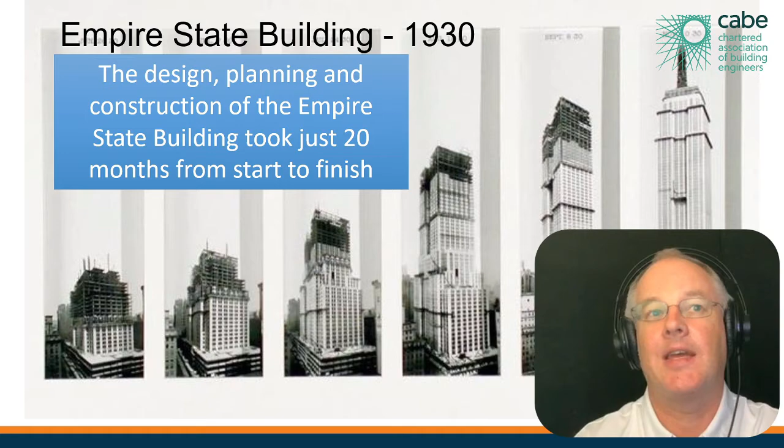So the Empire State Building in New York is over 100 stories tall. It's still one of the tallest buildings, if not the tallest building in New York. The design, the planning, and the construction of this building took 20 months from start to finish. Question is, could we design and construct this building today in 20 months? And I would argue probably not.

The construction was moving at such a rapid pace that in one period of 10 days, the builders created 14 floors. 14 floors in 10 days. When I was working in Hong Kong, if we could do 1 floor in 2 days, we were quite happy.

And the most important thing when you read about this building is that speed, that accelerated construction process. While it was part of the heated 'who can build the tallest building in New York first' phenomenon in the 1930s, it was made possible through precise coordination of the building design, as well as the mass production of steel frames and windows and many other elements.

The precise coordination of the building's design. Do we in 2020 have precise coordinated building designs when we start construction? I would tend to believe not. And how much of our buildings are mass produced off-site? I would argue not enough.

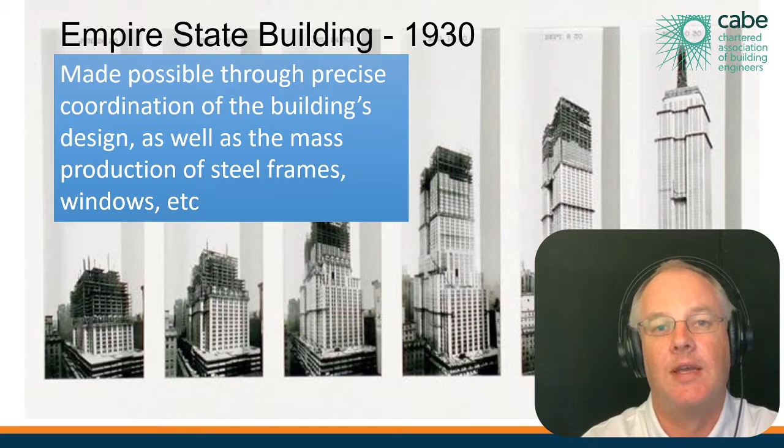So when we talk about the post-COVID-19 phenomenon, we need to look back through history and see what's going on. So let's have a quick look back at what we've achieved in digital engineering, BIM, virtual construction over the last 15 years. And then I'll give you a rundown of where we're going in the next 5 to 10 years.

So my journey began in 2003, earlier than 2003 even, doing 3D modeling and construction sequencing. So around 2000, I started using Tekla. 2003, I was using things like Rhino and CAD. Come 2006, 2008, we were getting into things like Revit.

2006 through 2010, we designed and built the Cathay Pacific Cargo Terminal. That building finished 10 years ago. It started 15 years ago in Revit. Then we did the Hong Kong MTR projects.

And then from 2010 to 2015, we did the big Midfield Concourse at the airport. And now the airport in Hong Kong is going through a massive development phase. In fact, I noticed on LinkedIn 48 hours ago that they were talking about a digital twin for Hong Kong International Airport. So if you want to learn more about what they're doing there, look them up on LinkedIn. And then from 2016 until now, I've been heavily involved in the Line 2 project for the MRT in KL. So this is an outline of what we're going to get through this evening.

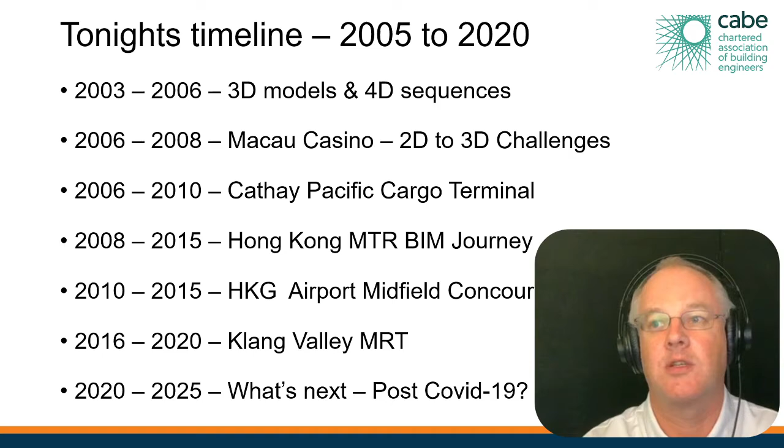So the first ever BIM project, and this is before the term BIM was even coined, you have to go all the way back to 2005 in Hong Kong. And this was a school, the Canadian International School. They wanted to build a world-class musical and auditorium facility for the students.

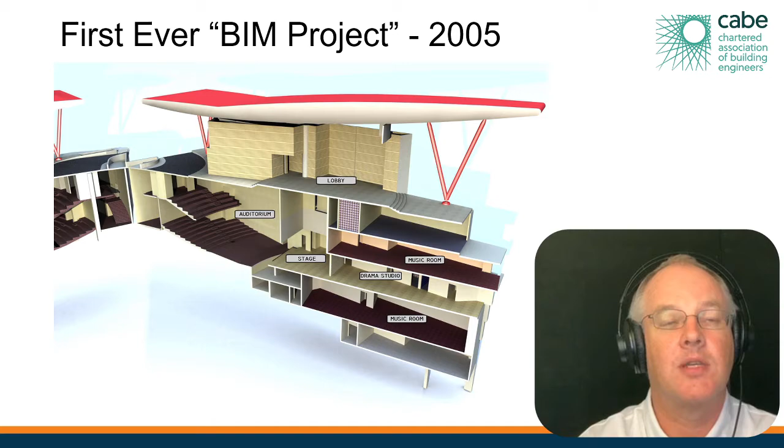We were working with the architects, the engineers, and the owner to do a verification of the design using 3D models. So everything was designed using 2D drawings, and then we built these 3D models. This is a cross-section of the building. And then we looked at the construction sequencing.

Because of the nature of the site, it was a very complicated site, very steep. So we built a 3D model of the temporary works, a 3D model of the existing site, and then a 3D model of all the foundations.

Now this was done in 3D CAD, so this is all pre-Revit. Revit wasn't even kind of written at this point. So this is so long ago. But it just demonstrates to you that building 3D models - if you're not building 3D models in 2020, you better start figuring out how to build them. You can't turn around and say in 2020 that, oh, it's too hard, or it's a new technology, or I don't know how to use the tools. You need to learn these tools, and you need to learn how to use them and make value from them.

We even did the MEP models for that particular building. So we modeled all the ductwork systems, we modeled some of the fire sprinkler systems. It looks rudimentary, it looks quite basic, but it was still done, and it demonstrates what's possible.

Now, moving on, a couple of years later, we did a very large project in Macau, and some of you may recognize this if you're familiar with Macau. This is the City of Dreams, and it was built and designed and put through in a very short time frame, but we relied upon BIM to do some of the coordination.

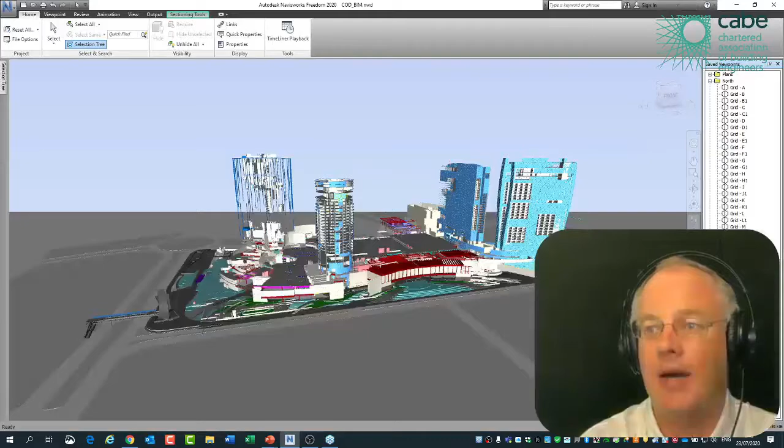Now, in preparation for this presentation, I actually went back and found one of the models. This is AutoCAD MEP and Tekla Structures, and a little bit of AutoCAD Architecture. This is pre-Revit, and it shows you that a model that was built some 10 years ago, even now in 2020, we can actually go into that model and see the detail of it.

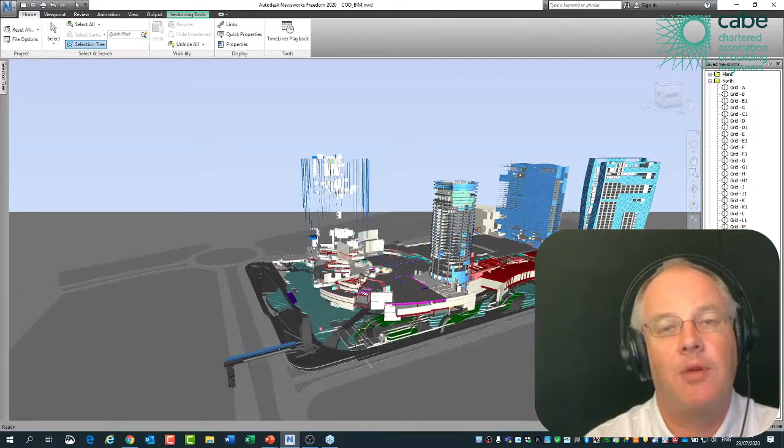So it's worth bearing in mind that models and information you're generating now - the way these technologies work - will still be available to owners, future architects, future engineers as they go back and rebuild and look at these projects. So this gives you a sense of it. And I'm just going to pick a grid line here just to show you what this looks like in section.

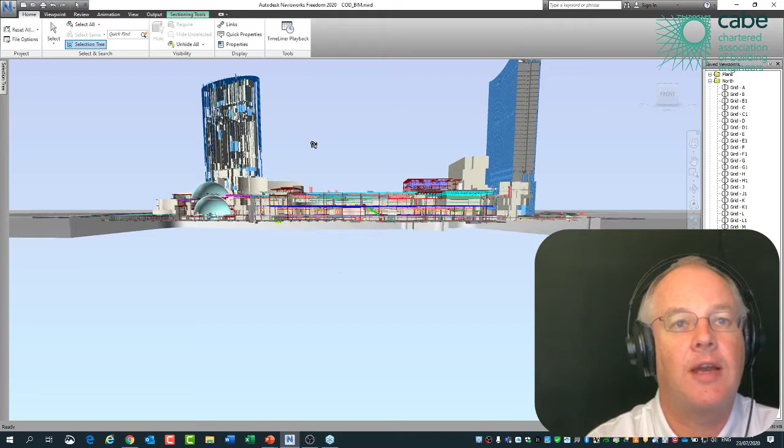So like all these casinos, there's a very large area in the middle. I can't get into too much detail for lots of good reasons, but I just want to show you one feature of this casino. In the casino, there is an exhibition space, and it's a spherical space.

So I'm going to do - oops, what am I doing here? Looking for this one.

I've got to remember how to use Navisworks. So you can see, even in a model from that far back, we had all the mechanical systems and the structural systems.

But the problem with this particular part of the building was we had to design this spherical shape. We had to design the supporting structure around it, the MEP around it, and the glazing system on the outside as a feature. So you can see here that this model is, relatively speaking, quite straightforward.

What I'm going to show you is how we did the coordination of that model. Let me just quickly bring up the right one. Should be this one. Bear with me one second, I'm working on two screens, so things are going to pop in and pop out.

So this is what it looks like. This is a presentation actually from back then. So I'm going to show you the actual geometry.

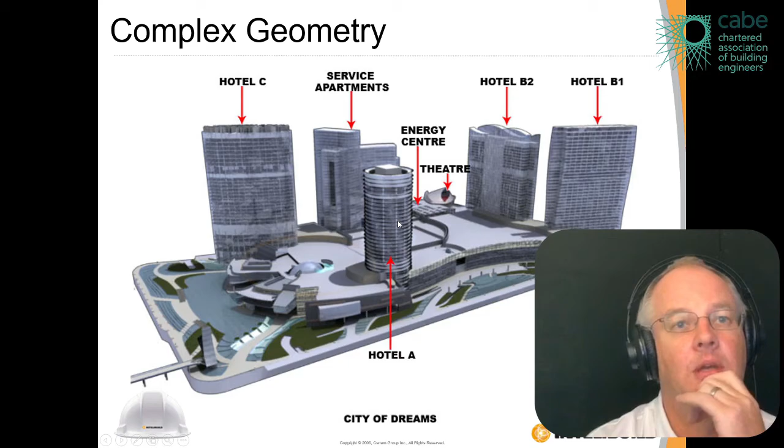This was the architect's design for what was called the bubble, and you can see in the middle of the screen the kind of spherical shape with a slight distortion at the front, and how it fits into the main entrance area for the actual development. As far as I know, it's still there.

When you cut a section through it, you can see the external elevation, you can see the basement car parking, and you can see the complexity of this shape.

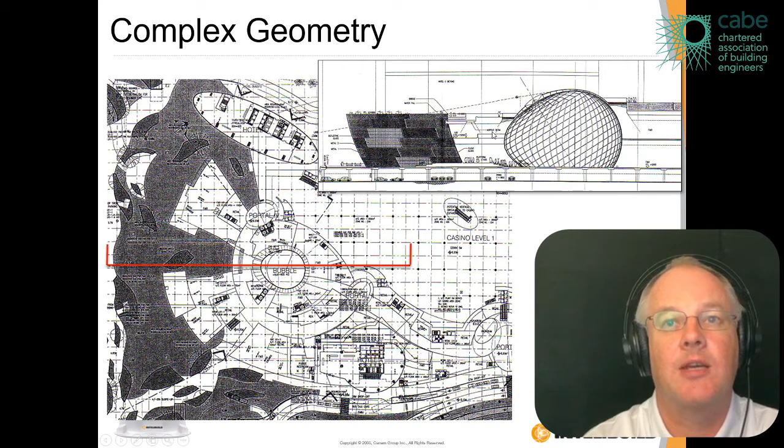In order to design and construct this, we had to use parametric modeling. Now, parametric modeling is rule-based modeling, so if you make changes to certain features, the whole model will change in relationship. So this is an initial geometry model in Rhino.

And then when we get into the detail of it, I can skip this for a second. We then moved into using what became known as Gehry software, which is the same software that we use for airplanes, which is Catia. So this is actually the Catia software.

Catia was used to come up with all of the structural elements inside this complicated geometry. And because Catia is parametric, we could do all this calculation.

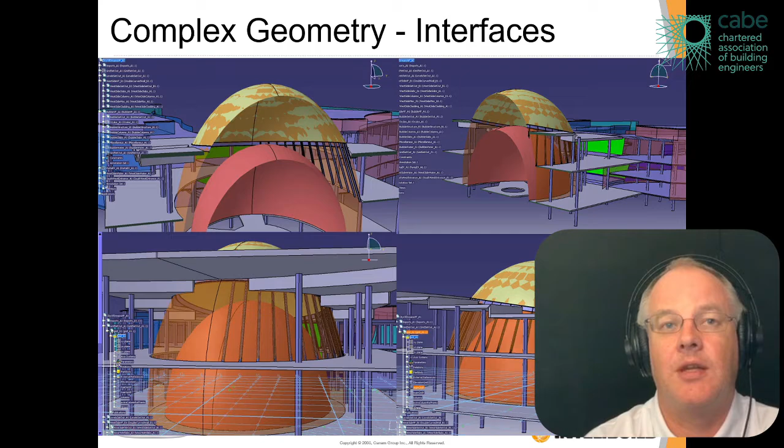So again, this is just a demonstration to say that there's nothing new in the world of BIM that hasn't been done in the last 10 or 15 years. You should be able to find some of these examples either through these kind of presentations, by contacting people like myself who've done it, or by finding out how to do it yourself. The information is there. Now is a good time to go and learn how to do some of these things.

And what's great is when you look at some of this information from all those years ago, we were using these models for quantification. One of the things we're struggling with in the industry right now is how do we actually use the information in the models for pricing? How do we use it for variations and value engineering?

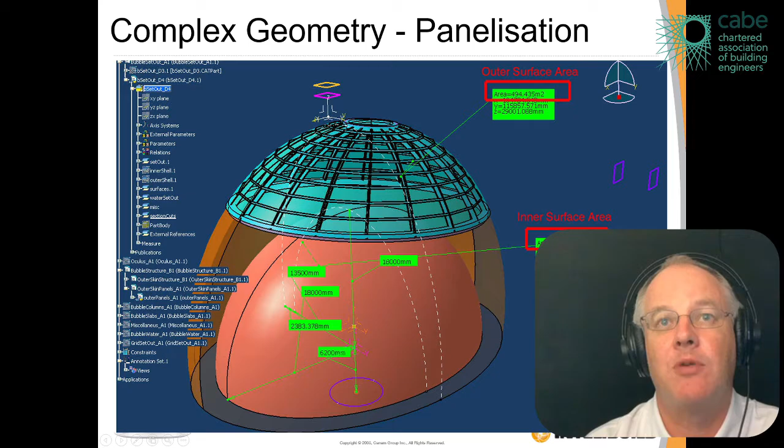We were doing the same thing before. We were looking at areas. We were trying to calculate geometry setting out. So we were using the models to take the model from the actual digital world into the site world, providing all the setting out to the guys on site.

And we were actually using the bigger model of the actual structural steel for all the quantification. So we knew, as we were doing the detailing, how many tons of steel we had. We knew what sections we needed to order, and what the lengths of those sections were going to be. So we had quite a lot of information available to us even back then.

Now, it's worth bearing in mind, when we were doing these projects 10, 15 years ago, they were at the front of the industry. They were cutting edge, pushing the limits. It wasn't the normal. But in my opinion, by now, the industry should have caught up. And you have to ask the question, why is this not normal in all of our projects? If we could do this 15 years ago, why can't we do this today?

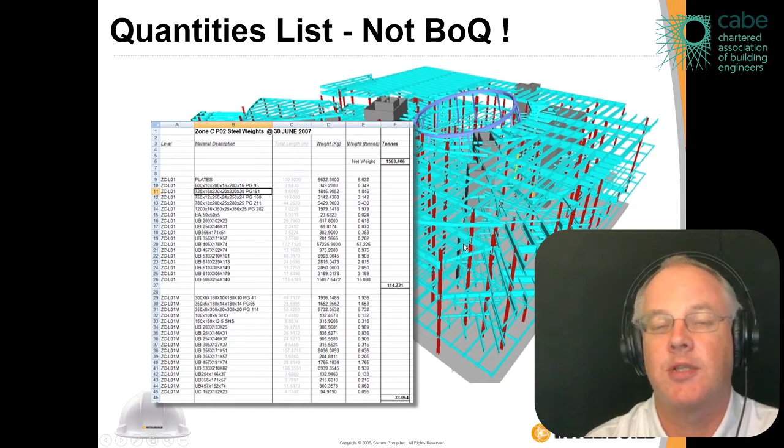So this is what we should be thinking about in terms of post-COVID-19. Now you're going to see me jump around to the next part. So we go back here.

The next one I'm going to speak about is probably the first true BIM project that we got involved with, which is the Cathay Pacific Cargo Terminal. And the Cathay Pacific Cargo Terminal was...

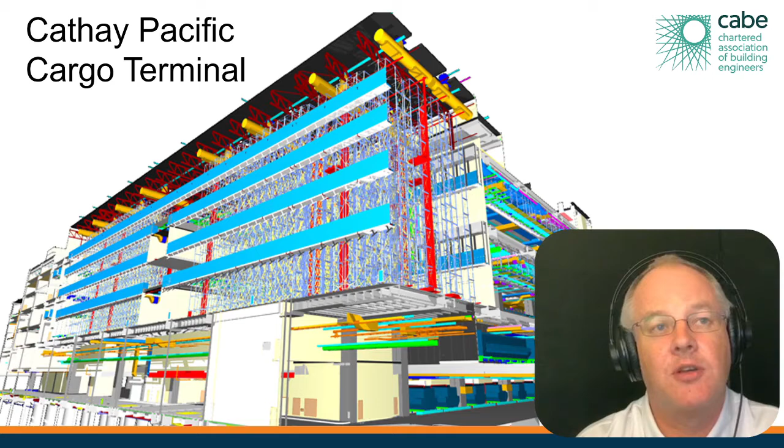There was a requirement in the design specification by the owners, Cathay Pacific Cargo Services, to design and coordinate this building in 3 dimensions, which was a precursor to BIM. When we went to construction, the models were provided to the contractor, a joint venture between Gammon and Hip Hing in Hong Kong, working with Siemens and Lodige doing the cargo systems that had to coordinate this project.

So let's have a look at the details of this one. Just bear with me one second. There we go - so this is another cross section through it.

Now this building deservedly was modeled in 3D, because I don't know how on earth you would coordinate it using 2-dimensional drawings. It's so complicated - there's many layers, many interfacing layers, many secondary systems, many access systems and fire systems, et cetera. So it really begged to be modeled and coordinated in 3D.

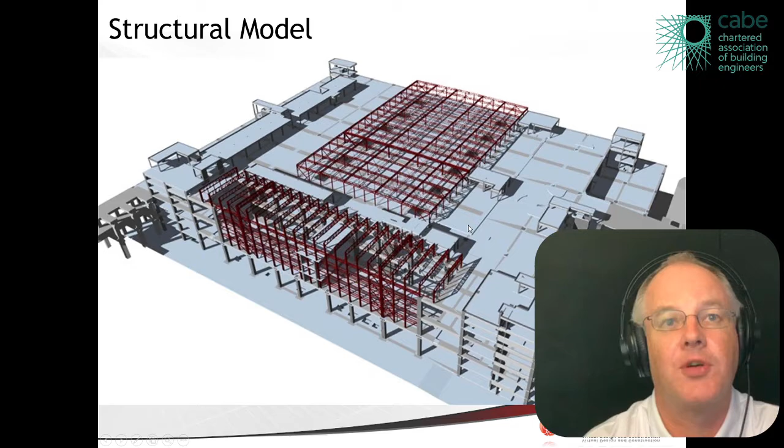And the mantra here was to model first and draw second. So our objective was to use the Revit software to produce as many drawings as possible, but our real objective was to coordinate the design.

So here you can see a snapshot for those of you who know Revit - this is actually Revit Structures 2008, which means it's a 13-year-old piece of software. I wouldn't like to have to use it now. It's a lot better now than it was all those years ago. It had a lot of limitations, but it still was a powerful piece of software.

And we used it for this kind of documentation - for doing the detailing for the frames, and for laying out all the double T's. And this is what it looks like back in the models.

So again, when we built the models, we tried to be smart and put in the names of what the double T sections were, what the inverted T sections were, so we could get information from the models. Now, we did not use this model for quantification - we used it mainly for coordination, and you can see how we've done that.

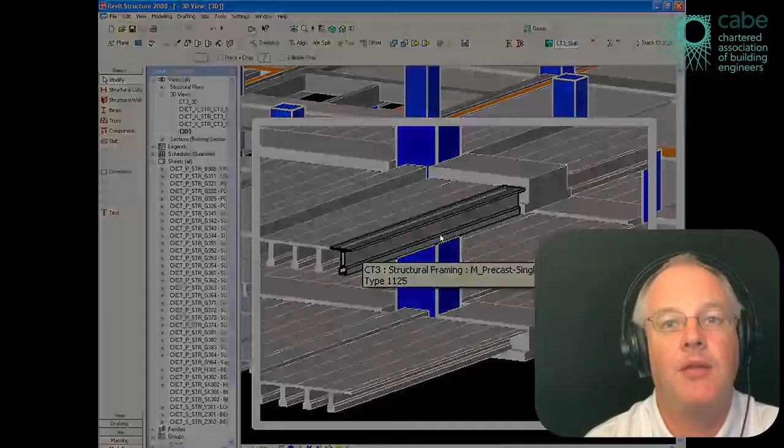This is the architectural model - there's an office building in a corner, and then you have this massive warehouse. If you have flown into Hong Kong, you will have noticed this building. It's impossible to miss. It's huge.

And then on top of the architecture and structure, we did all the MEP modeling. So you can see here an example of the MEP framework - you've got pipework systems, cable tray systems, and mechanical systems. So again, this is a very good example of a 3D MEP model that was done for coordination purposes.

So this is one lesson that you can do it. Second lesson is, did we have enough detail in the design model for construction? Could we live up to the Empire State Building standard of a precise, fully detailed design? The short answer was no, not really. So let me explain why.

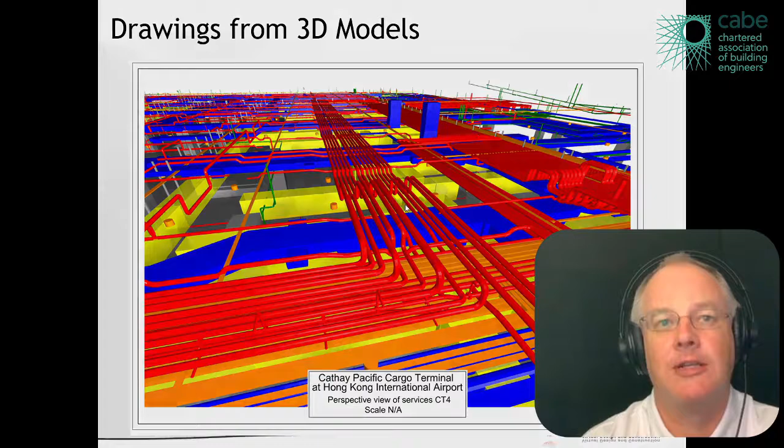We were using the model to produce design drawings, and we were going to use it to produce construction drawings. But the design drawings were being produced by us and the design team primarily to meet the normal standards of the industry - in other words, to provide enough information for a contractor to price the project, but they would have to go further to do detailed shop drawings and fabrication drawings.

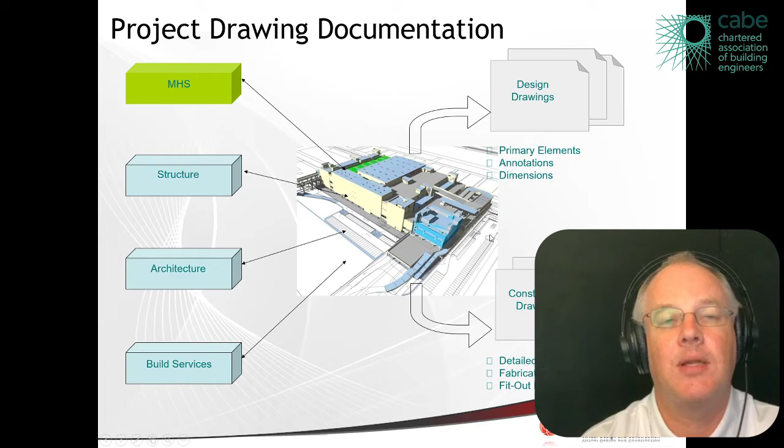So it was effectively a reference design, if you want a better description. But it was a very well designed, very well detailed set of plans - they were design drawings. And there's the software that we were using: Revit Structure, Revit Architecture, AutoCAD MEP.

This is just to demonstrate something else. If you're living in Hong Kong, they're now talking about using ISO 19650 BIM standards. If you're in Singapore, you've got the BCA standards. In Malaysia, we're using PAS 1192 and ISO 19650.

All of those standards are based on one simple principle, that you have a server. In our case, it was actually a local area network, not a cloud, but now it's all gone to the cloud.

You have a server where you have working information, in our case drawing production information, and you have published information, which is information that's shared. The same principle applies today as it was when we did our project. It's on a server, shared between the design teams, and then published when it's approved.

We were publishing PDFs and DWG. We were using a structured folder structure. Now this is quite a basic folder structure, but you can see we had a live working environment and a published environment, which is what the current standards all require.

So you have 2-dimensional drawings, 3-dimensional CAD files, clash analysis files, and native Revit models. All of this information was properly named, so we could tell by the naming convention which project it was, which type of file it was, which discipline it was, and what level of the project we're looking at.

So we did have a file naming convention. The modern file naming conventions are slightly more complicated, but it's the same principle. Everything was structured in terms of information, and everything was controlled in terms of the naming - a crucial part of the world of BIM as we see it now. We had somewhere in the region of 3,000 drawings at the design stage.

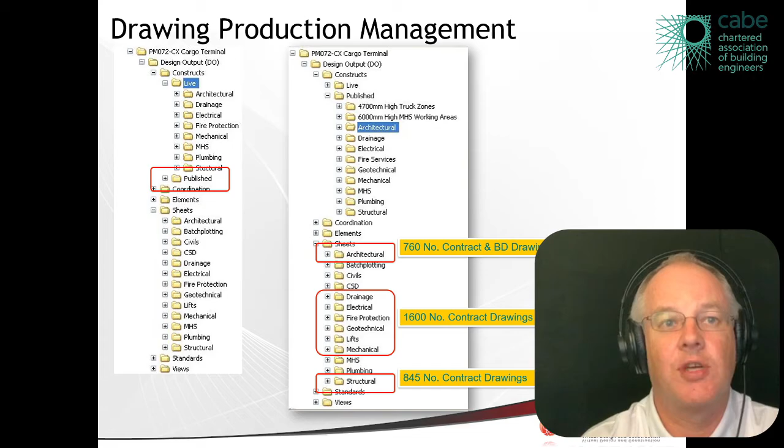So this is a typical example of what one of those drawings would look like. Lots of color, each system has its own color. And the beauty of Revit is that you can draw a section wherever you want.

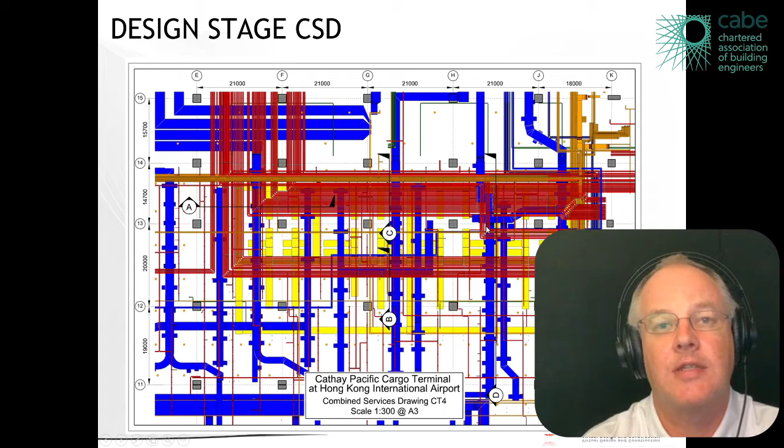If you've not used Revit before, one of the key features of Revit is it does very, very slick drawing production, and you can produce quite a lot of drawings and quite a lot of detail if you know what you're doing. And this is what those sections would look like.

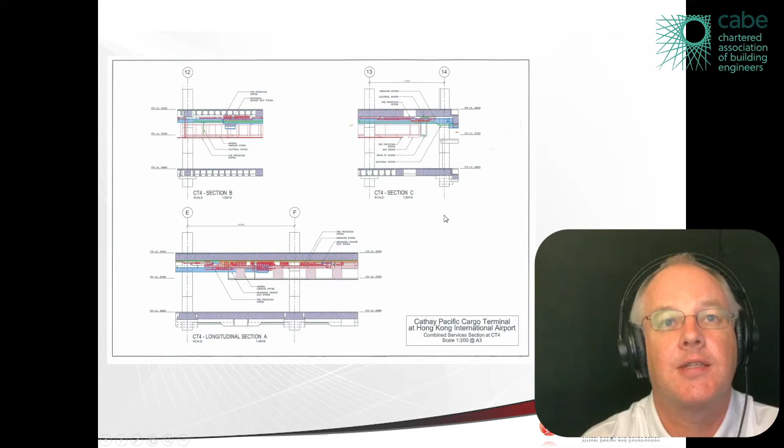So you can see the structure, the building services, the access ways, etc. You can probably argue on scrutiny that they weren't the best drawings in terms of line types, hatching, and where lines meet. But for the first editions of Revit, they were pretty good. Now Revit's got very slick, so producing drawings in Revit's actually quite easy.

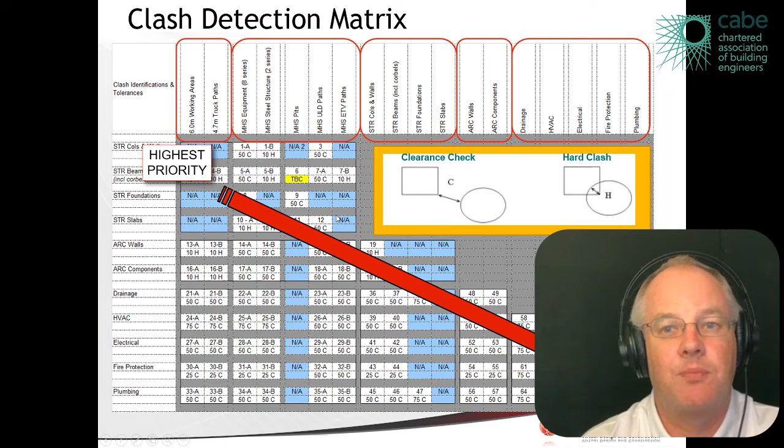The objective here is that you identify the critical elements from the client's perspective and operations perspective, and then you drill down through the structure, the architecture, and eventually the MEP. So you're working through a process of identifying what are the highest priority coordination issues and what are the lowest priority coordination issues. And that hasn't changed in 20 years.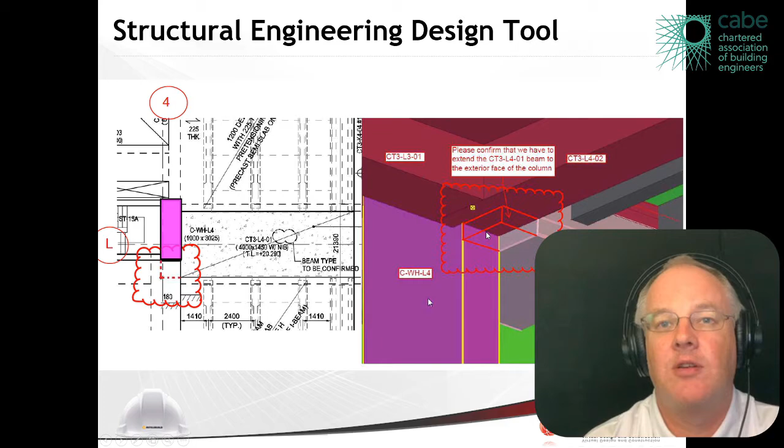And here is the key part of this particular presentation. This is now the contractor raising queries using the model for the detailing of all the concrete. They're starting to identify where the modeling has not been completed or had not got to a certain level of detail. In this case, the model demonstrates the size of the beam between the grid lines, and it demonstrates all the beams coming into a connection. But because this is a complicated movement joint, the detailing by the designers doesn't include all the fine detail of where the corbels will stop and where they'll meet.

Another issue we've discovered, and this issue is still relevant today as it was back then, in these large infrastructure projects, the designers will typically model the structure as being flat. In other words, they won't allow for any falls, any kind of cross falls, because that's something the contractor will pick up in the shop drawings. But when you start modeling in the falls, you start to realize that every one of these connections is slightly different, so you have to account for all that when you actually start doing your concrete pours.

So you can see that there's a fall on the edge beams, and then there's a cross fall on the secondary beams, which leads to some very complicated joints in this detail. This is where we discovered that the cope, or the joint at the end, is not square. So it's just using a model from the construction phase to show this detail.

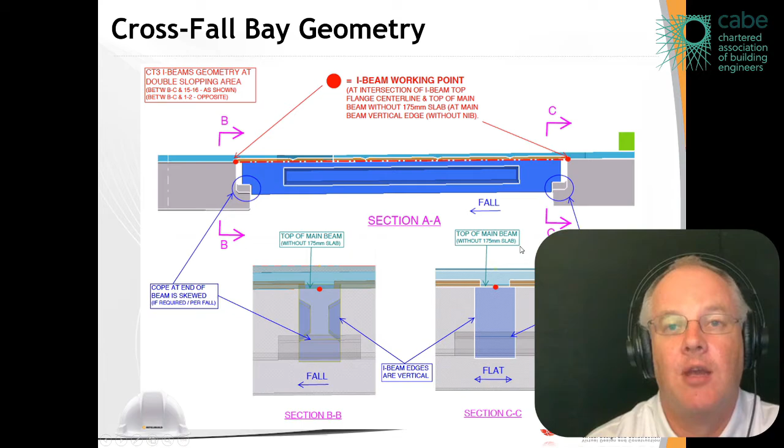Now the lesson learned here is that ideally you want to get the contractor involved as early as possible for them to bring this level of expertise into the design team, or you need to get them as an advisor to get the models to this level of detail. But the trend hasn't changed. The design engineers' models and information are still going to be suitable information for tendering and for construction, for the contractor to take forward detailing. In order for BIM to be really successful, you need to get to that level of detailing, much higher, to find the real issues.

So where do we get to? That's the Cathay cargo example, back in 2008, 2010. So that's 10 years ago.

And then we're going to go and look at something a bit more recent. Again, this is a Hong Kong example - there'll be one in Singapore soon enough. This is the Midfield Concourse. This was, again, designed in 3D by the design consultants - an Arup, ADAS, Mott MacDonald design team - and they did a pretty good job at the design. Quite an interesting design, in fact, the way this is done.

And then they provided the models to the contractors for the construction stage. So again, I'm going to show you some of the challenges of going from a design model to a construction model, and some of the things that you need to be watching out for as more and more people start using models for design and for construction.

So we're going to come all the way back down here to the next PowerPoint deck. Some of you who are PowerPoint aficionados will say, well, hang on, why have you put all these slides together? I said, I haven't had the time.

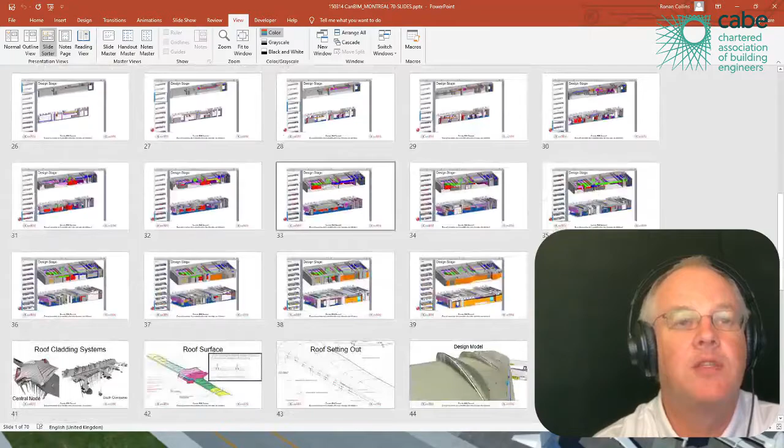So let me very quickly show you this. This is the overall slide deck, and it goes through exactly the same as I've shown you on all the other projects. On this project, we were modeling the structure, the architecture, and all the building services. We were using the model for coordination and for drawing production.

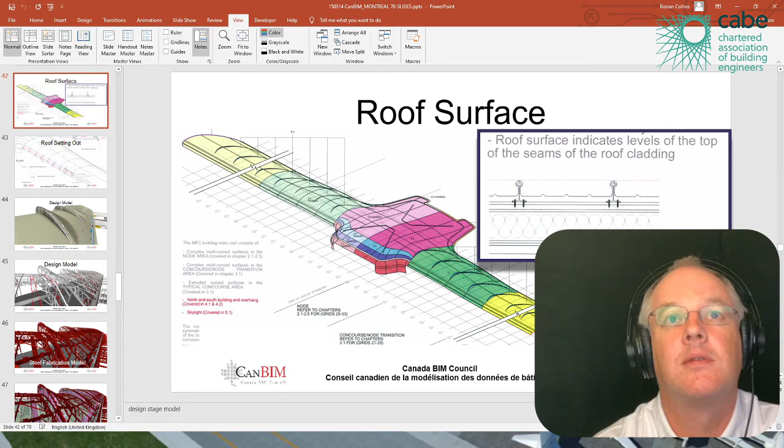And the one thing that I want to share with you from this project is the geometry on the roof. So I'm going to show you the roof surface and how that was designed. Just bear with me here. That, to go down there, out of the way.

So what I want to talk about here very quickly is this geometry. What we're seeing now is that because the software is becoming so powerful and so useful, architects are becoming more and more creative with their designs, and somewhat organic. And here's a challenge when you do that.

So these roof systems particularly, there's a huge emphasis on the contractor doing the detailing. You may have a very specialist contractor who can do the detailing for these kinds of roofs. So rather than the architect trying to second guess or outguess the construction industry, they come up with a performance specification and an outline design.

So in this example, they provided the surface geometry, and the surface is very well defined. You can see all the different colored surfaces - all of them have geometric definitions in terms of radiuses and setting out. You can see all these different curves, and this is the definition for the roof surface.

Now this is critical for the airport. If this roof ends up too high, it will actually block the line of sight between air traffic control and the actual planes. So this roof geometry is critical.

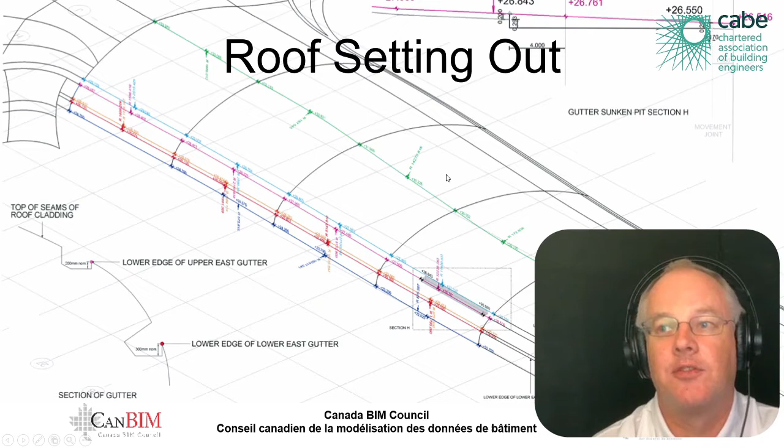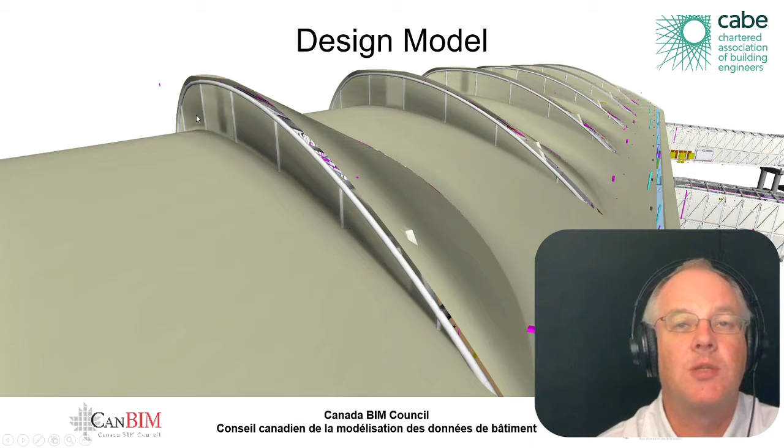But apart from a single gutter along the side, this surface doesn't allow for the gutters along the back of these skylights. It doesn't allow for access ways through the space. And it certainly doesn't allow for the detailing of the steelwork. So let me show you an example of what I mean.

So using the architect's surface, the engineers have developed the geometry for the roof steelwork, and they've done a reasonable job. You can identify the primary trusses, you can identify all the primary structure, you can see where the posts are going to go in for the cladding systems, and you can start to see the outline of what is supposed to be a walkway for access.

That's the design model, and this is the fabrication model, pretty much taken from the same position. And there's a stark contrast and a stark difference. The biggest difference is all of the connections required for the actual roof systems, but also all of the secondary steelwork that was not in the design.

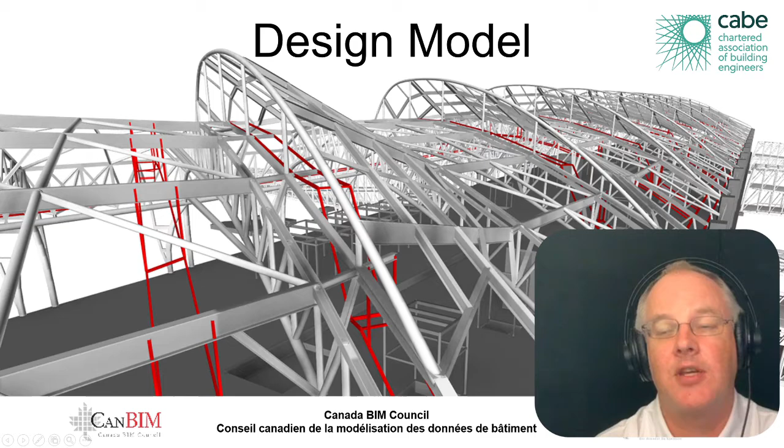So if I go back up one, so you can see here, for example, along this elevation, there's a lot of steel that wasn't modeled at the design stage. It's considered secondary steel. And when you model it in, there's quite a lot of steelwork involved.

So the challenge when you're working on these projects, particularly if you're a contractor, is to understand what has been modeled by the consultants, and more importantly, what has not been modeled, because that still has to get modeled, it's still got to get coordinated. So there's a lot of lessons to be learned from these projects in terms of, well, we know what the consultants are more than likely going to produce, but what do we have to produce to actually construct this building?

And then when you add in the next layer of complexity, which are these pink blocks for the access walkways, and then you start to see the ceiling systems underneath, and then you start to see the actual roof cassettes. This is a structural system with the acoustics beneath the cladding system. You start to put in the walkways.

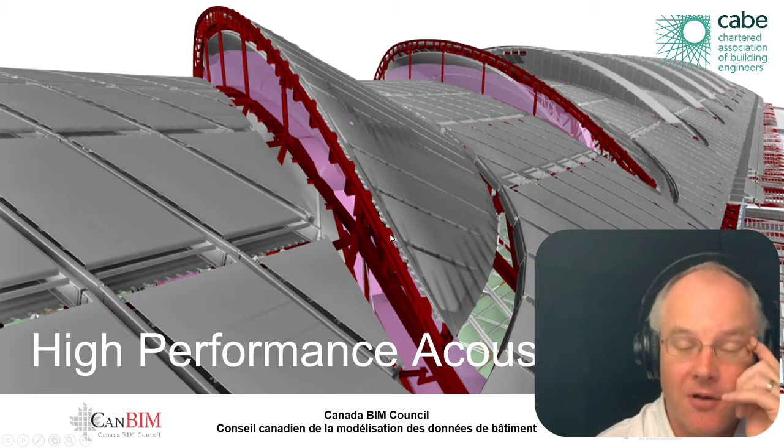This becomes a very complicated thing to coordinate, and it led to many, many meetings, many, many RFIs, many, many discussions, a lot of changes in terms of structure, a lot of changes in terms of geometry, but eventually it did get built. It turned out to be a fantastic building.

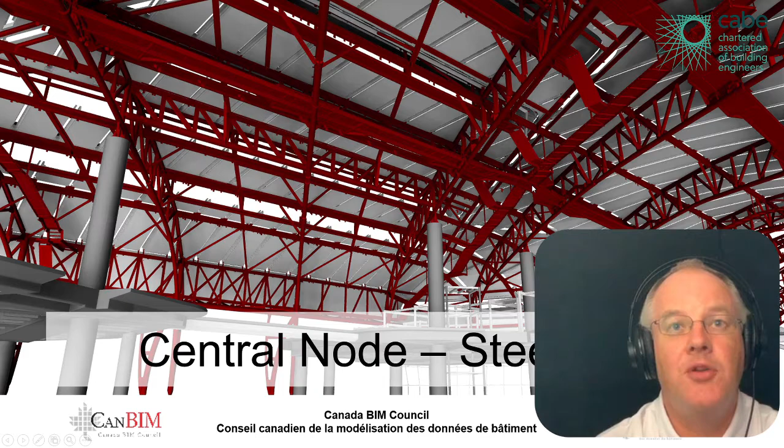But when you start to look at this from underneath, just getting the cladding system onto the building was one challenge, but to actually coordinate all the building services in the space and then to coordinate the ceiling in the space was also an exercise.

So the contractor elected to do all of that in 3D using BIM processes. So all of the mechanical systems, these were all modeled by the mechanical contractor. The lessons that we learned on the Cathay cargo terminal was to actually get the mechanical contractors involved in the modeling process. And they would model where they wanted the ductwork, where they wanted the pipe work, where they wanted the cable trays. And they would work with the steel fabricator to make sure that it was all coordinated.

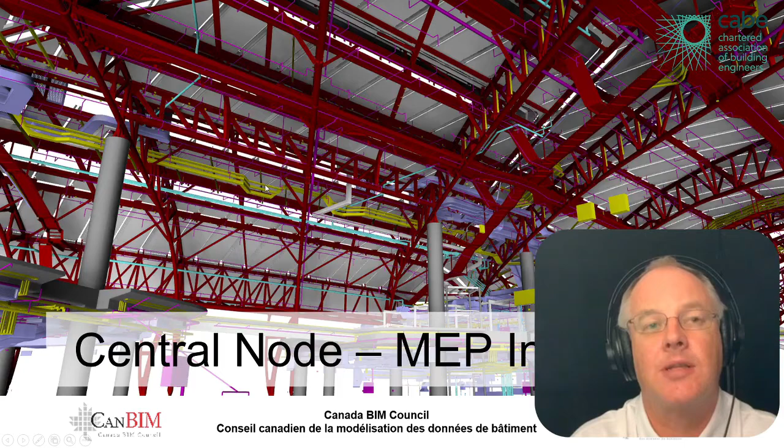So what you're looking at here is actually a model that was developed by 3 different contractors or subcontractors, depending on how you look at it. There's the steelwork contract, which was all done in Tekla. There's a roof cladding contract, which was done in Tekla. And then there's all the mechanical electrical systems, which are all done in Revit. 3 different contractors working on 3 different programs at 3 different schedules.

A real coordination challenge. And then beneath all that, you have a ceiling grid, and the ceiling is a very complicated grid of triangulated panels. I can't remember the specific number, but there was a huge variety of panels. Some of them were perforated, some of them were solid, some of them had penetrations. I think there was over 1,000 different types of panel that had to be slung into the ceiling.

So one of the challenges we had, and it's still a challenge today, is how do you go from 3D CAD or 3D BIM or digital engineering models and relate that to site?

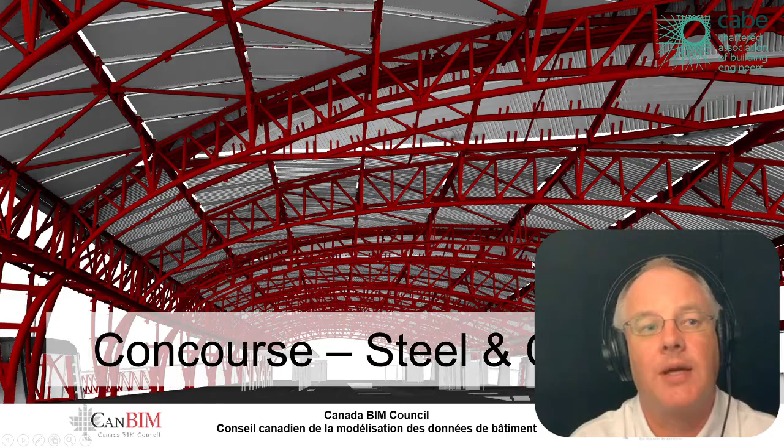Now, this was less than 10 years ago, probably 8 years ago. So how did we link what was happening on site back to the models? What we actually did was invest into laser scanning. I'm just going to show you how we did this.

So we actually scanned on site all the steelwork as it was erected. You can see it here, this green blur. We used the laser scan to compare to the actual fabrication models, so we were able to compare what was happening on site to what was actually designed and detailed. We could tell if the chords for the trusses, which were in between the ceiling panels, were in tolerance and into specification. So again, another topic for learning going forward: you need to understand how to verify what's on site and compare it to a model.

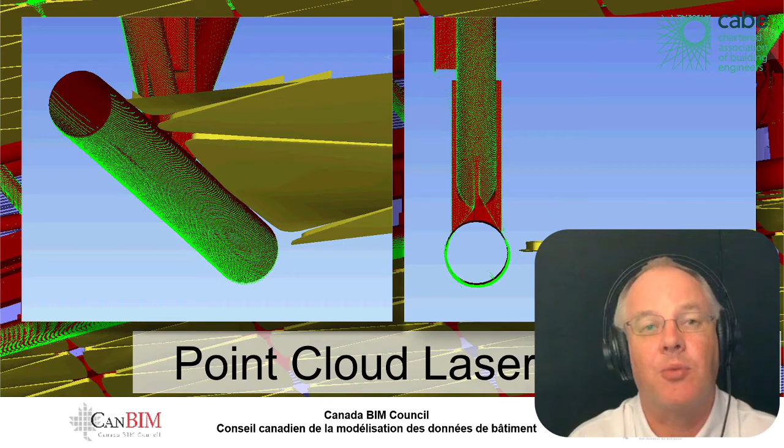Now you have more and more technology available. You can use your iPhone or your iPad to take photographs and create 3D models from photographs. You can use augmented reality, so you can actually bring the model to site on your iPad and look through your screen to see where the model is in relation to site. And you can do very detailed laser scanning. I'm not going to get into the pros and cons of each - it's a lecture in itself, but we could probably set that up as a separate conversation.

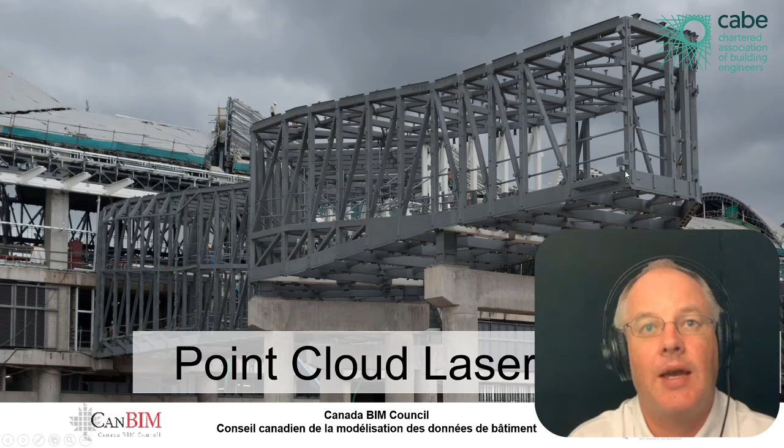But I want to quickly show you one of the benefits we learned about using laser scans. These are the actual air bridges or gantries, and in order to cover these in cladding, we had to measure all the connections on site. So we laser scanned all the gantries, measuring for each connection plate how far out of tolerance they were and where the slotted holes were, to make sure we didn't have to make any adjustments to the cladding system rails so we could quickly erect the steelwork on site. This is a really good example of using laser scanning to verify shop drawing details and make sure it's in tolerance for the next phase of works.

So we're getting a bit closer to real time, and I want to quickly show you some of the solutions. We've talked about BIM in terms of building information management. Virtual reality is something I have some experience with, but I've found limited use for it, particularly on construction sites - it's very powerful for design reviews though.

Augmented reality is an absolute breakthrough technology. We're using it on 10 of our sites right now, taking Revit models onto the sites on iPads, using it to verify rebar, to verify cast-ins, to verify MEP systems, and to verify a lot of the works on site. So augmented reality is something you definitely need to figure out and learn. But you can't do augmented reality if you haven't got proper detailed coordinated models.

Drones is a topic unto itself, which I'm going to touch on. Photogrammetry is the conversion of images into models - you can use Context Capture from Bentley, or Recap Pro from Autodesk, or a number of similar products out there. You can use laser scanning, which gives very fine detail. 3D printed models are great for doing modular testing. And then you've got all the other stuff at the bottom.

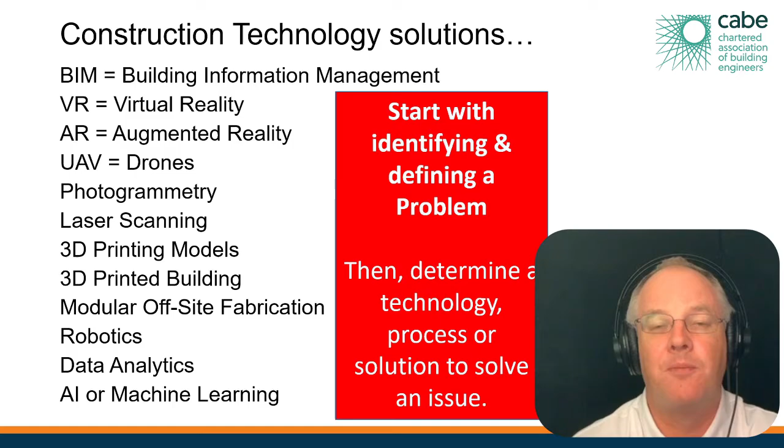On the construction site at the airport, we were trying to solve a surveying problem in very complicated access areas. In the work we're doing now using augmented reality, we're trying to solve a problem where the sites are very dynamic and we need to make sure they're checking the right information. So we have always defined a problem - well, not always, but that's now our rule. We now define the problem and then we go and find the solution.

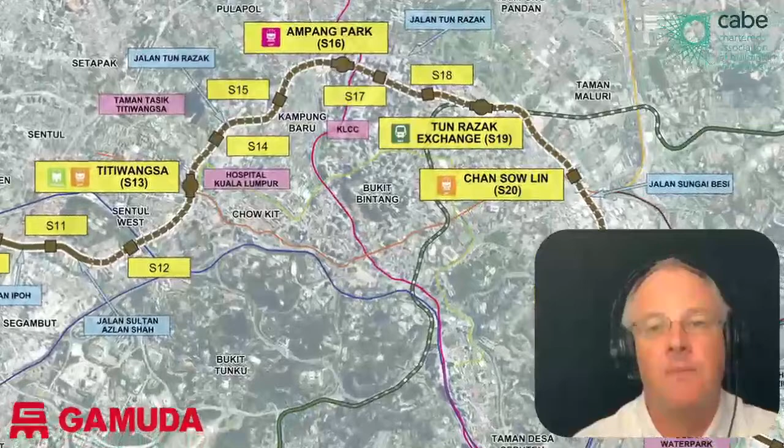So let's bring it right up to today. This is the KVMRT Line 2 project in Kuala Lumpur. This is a massive project - a 52-kilometer alignment through the city of Kuala Lumpur. This is the second line that's been built in the last 6 years.

The section that I was working on is the underground section. It's a design and construct contract led by the MMC Gamuda contractor, with AECOM as the lead consultant, with a multitude of other consultants in support. It involves the construction of 13 kilometers of twin-bore TBM-driven tunnels through the city, which is a mixture of Kenny Hills soil, a compact soil, and karst limestone, a treacherous ground condition to mine in.

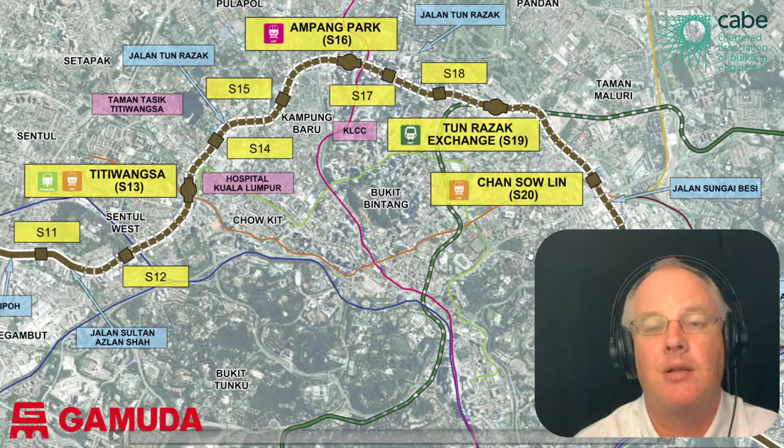There are 10 underground train stations, and all of the stations, all the tunnels, all the ancillary structures were all designed and modeled in Revit. And then the models were used for coordination, for design documentation, for construction documentation, and are now being used for all the MEP installations. So this is just one of these 10 stations - it is at Titiwangsa. This is the architectural model in Revit.

So you can see that first rule - only model the Revit architecture. Then you've got the structural model, so this is all of the D walls, all the structural information. And then this is where this technology comes into its own.

Inside these station boxes are some very sophisticated, very complicated building services systems. So here you can see the mechanical systems, electrical systems, drainage systems, and in the background you can even see the tunnel systems coming into the stations. And the only way to coordinate this, in my opinion, is in BIM. There's no other way of doing this, unless you've got thousands of staff and thousands of hours.

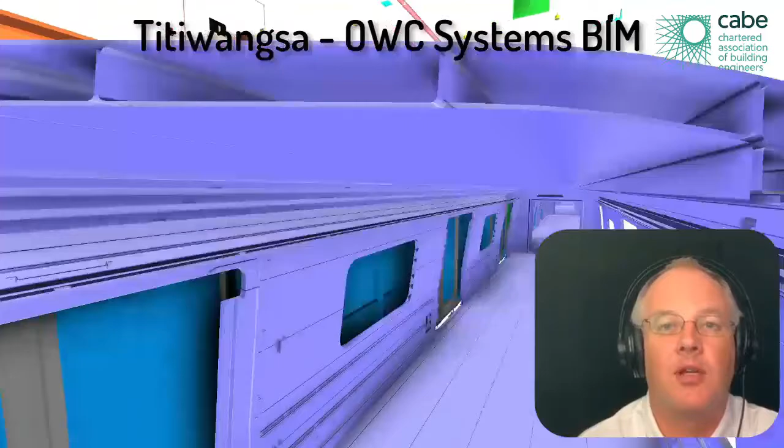The models also include all the operating train systems. And then this is a federated model - this is level 2 BIM as defined in PAS 1192. This is a federated model.

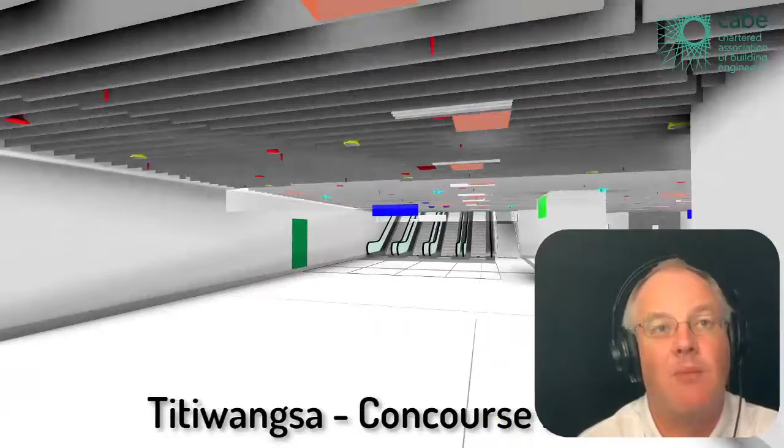This is all of those systems in a single digital environment, and all of the information for the systems is included. So if I was to click on any one of these elements, you would be able to determine what it is, what it's been designed to do, and what it's intended to be specified as. You can use these tools to cut cross sections so you can see the depth of the station.

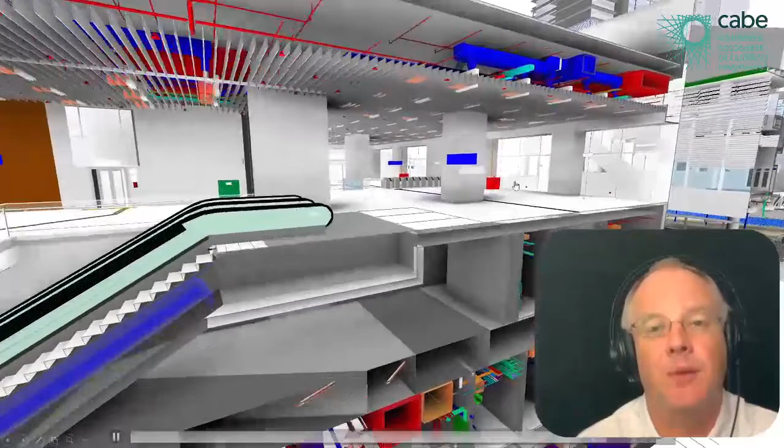So this is a classic implementation of BIM. The only difference between this project and the previous ones is this has been driven by an information protocol, which I'm going to get into in a bit more detail. So on top of doing BIM for modeling, on top of using BIM for drawings, we also wanted to use BIM for asset information or asset data capture.

So this is the actual use case for BIM on this particular project. During the phases of design, from preliminary design through final design to construction into final CSDs and as-builts, all the normal stuff - visualization, design authoring which is modeling and drafting, doing virtual design reviews and coordination, clash coordination - and then asset data capture. So the lesson that's been learned on this project is all about information management and data capturing.

So let me show you some of the things that we've learned. This is a classic example of one of those models, just a snapshot of the same thing that I showed you in the video. So the first thing you have to do is you have to change the culture of the teams.

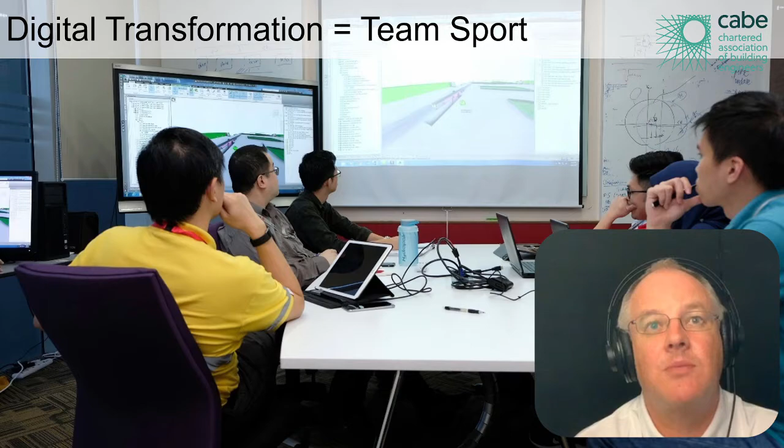The first thing we did on the underground project was take a lesson we learned back on the KLIA cargo terminal: we co-located the teams. The engineering teams were all set up in an office in Kuala Lumpur with all the major decision makers in that office. The architects, the structural engineers, the building service engineers, and the contractor's technical team were all working from the same office, so it was very easy to get everybody together and do a review.

The second thing we did is we drove all the reviews through models. So all the design reviews, all the coordination reviews were driven by models. And in a lot of cases, we would have a representation from the client.

This is Mr. Yap from MRT, an interface coordination engineer, who attended some of the meetings. This is Chi Heng from the AECOM lead team. Chi Heng and others are now working in AECOM Singapore, so if you want to get a coffee and ask him if this presentation is true, look him up there. And then the rest of the team here are from the engineering consultants.

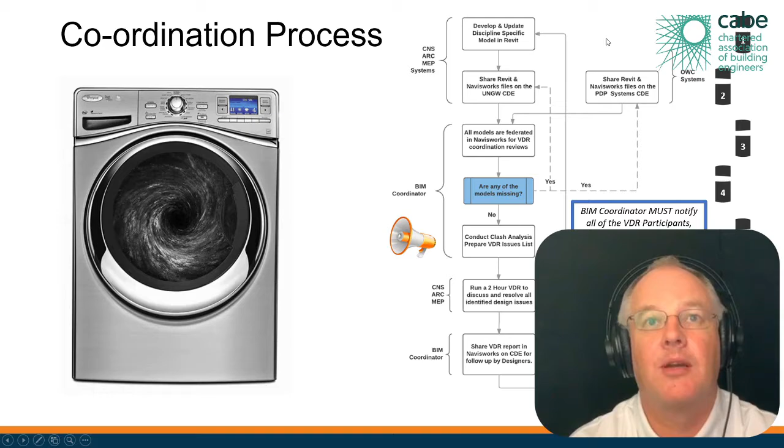They're reviewing the models, and what they're doing is following this process - sorry, some was blocked out by my big ugly head. We have a coordination process where all the models were checked and then coordinated, looking for coordination issues.

This is the low-hanging fruit, the easy part of BIM: checking if one model is coordinated with another. You can identify if the cable trays are in the wrong place, if the pipes are clashing with the ductwork. You can find lots and lots of issues.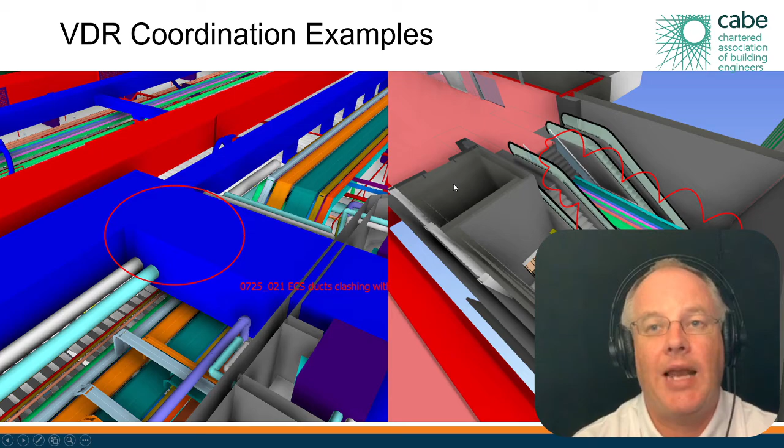The one thing we did on this project that was different from previous ones is that all these clashes, which would normally just be left in Navisworks - and we've saved issues in Navisworks many times in the past, since it's our coordination tool - we actually took those issues and published them onto a cloud.

We put them onto a tool called BIM Collab, so you don't have to have the model to see what the coordination issues are. More importantly, BIM Collab allows us to issue them to particular people in particular organizations, making somebody responsible and giving them a deadline to fix it. So on this project, we went from just doing clash analysis and writing clash reports that nobody looked at, to actually using a cloud tool where we could assign responsibility to individual engineers and architects and get them to resolve problems within a certain time frame.

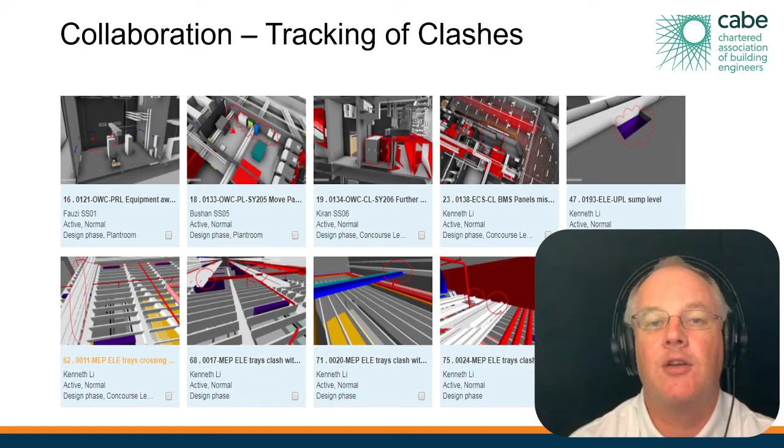So this tool became very, very important. If you've not heard of BIM Collab, it's definitely worth looking up, and there are a number of other tools out there that do similar functions. The key here is to make the issues as available as possible to as many people as possible.

Now the backbone to all of this, as I mentioned earlier, is the common data environment. On this particular project we're using ProjectWise. We have staff in Kuala Lumpur, Singapore, Hong Kong, the Philippines, and India. While we had co-located engineers leading the design, all of their supporting teams doing the engineering calculations, a lot of the modeling work, drawing production, and design management were being done offshore. So we needed a platform to link all these locations together - this common data environment, or CDE, another common BIM term.

we have to rely on technology like Microsoft Azure servers, and we have to have basically backup servers locally. So we've actually got a replication server in the main office, so overnight we would get all the files set up in the main office based on the cloud information.

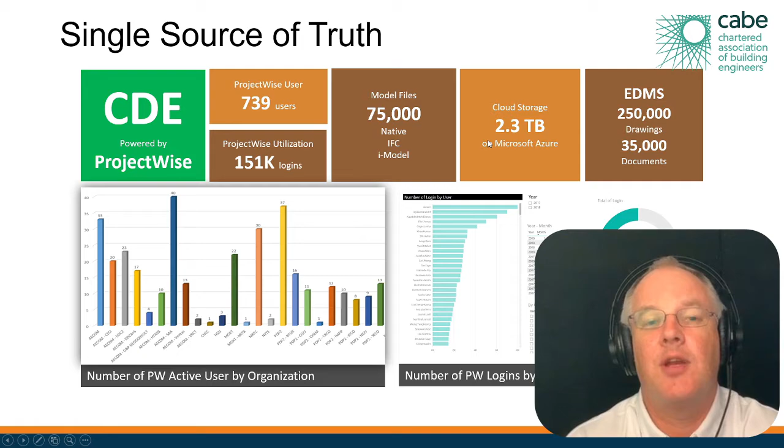So there's quite a lot of technology involved. But the most important thing here is this notion of a single source of truth. The only information that was valid on the project at any given moment in time was the information on the ProjectWise server. So if you had a model from somewhere else, or you'd received it by USB, or someone had emailed you some PDFs, they were not valid—they may have been superseded or incorrect. So the only valid information was on this particular CDE.

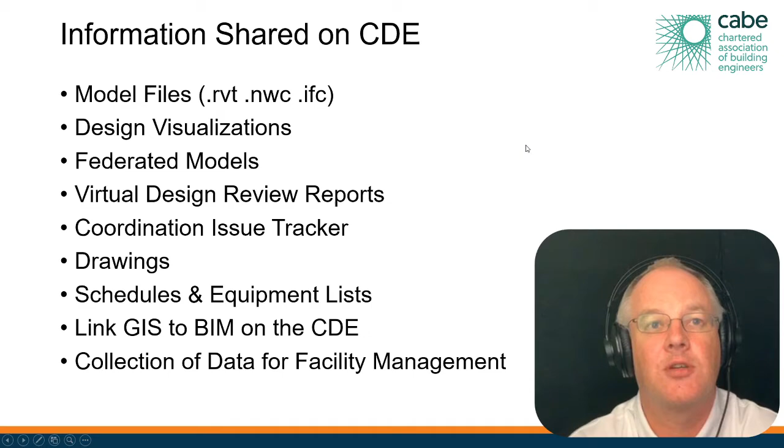Just to give you a sense of it, you can store any digital information that you want on a CDE. That can be models, reviews or reports, issue trackers, drawings, schedules, and most importantly, all the asset information management, which I'm going to show you.

So we've actually complied pretty much in its entirety with PAS 1192, and now we're working on upgrading our skills to ISO 19650. Again, if you don't know what these standards are about, or what their requirements are, now is a good time to start learning about PAS 1192 and ISO 19650.

So I'm going to give you a couple of tips as engineers. Actually, I need to go back—in order for these technologies to take off in any organization, excuse me one second.

There are three questions you should ask: What do I need to do? What does my boss need to do? And what do my colleagues need to do?

For something to be successful, this is a team sport. You may be tasked with identifying the business case, and finding out what the right technology is. Once you've done that, you need to understand what your boss has to do to keep the whole thing going. And then you need to understand what your staff and colleagues need to do—in other organizations as well, not just your own.

So let's look at some examples. I always say that you need to take ownership—be responsible for your own ideas. You identify the problem, come up with a way to use or adapt the technology to address it, then develop a budget, a plan of action, and roll out how the innovation is going to take place. Basically, you own it.

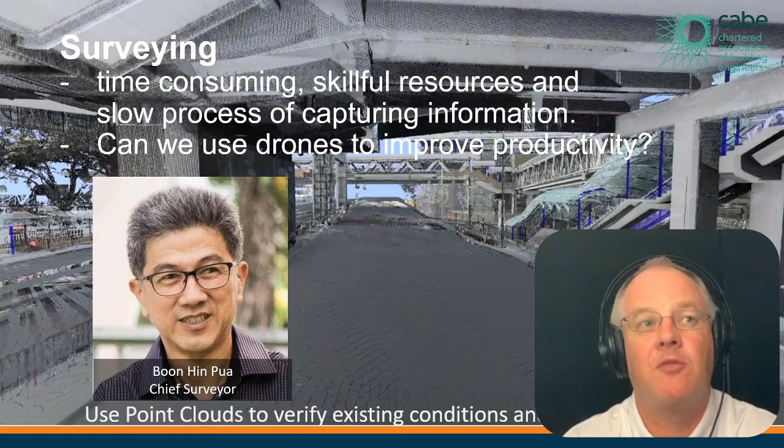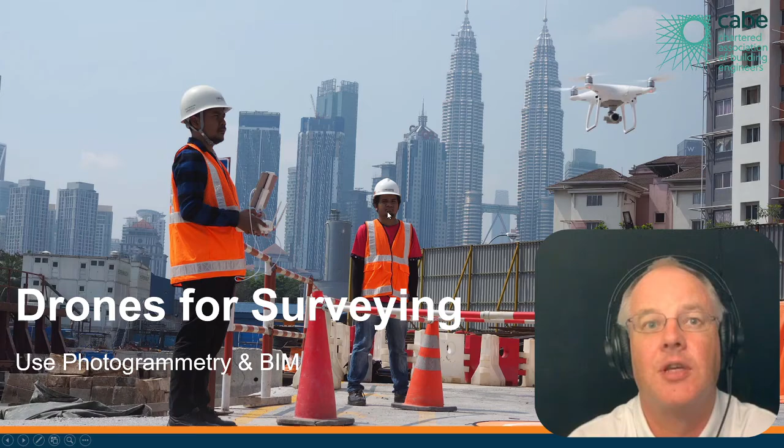So Mr. Pua started using laser scan point clouds, and then his team—you can see Phi here in the middle—we trained the surveyors how to use drones to do surveying. Here you can see an example of Phi, one of his colleagues. First thing to note: there's always two people involved—the operator for the drone, who looks after the actual operations of the craft, and a safety spotter. So while he looks like he's staring into space, he's actually keeping an eye on the surroundings. This is a great picture—this is the Petronas Towers, or KLCC as it's known here.

If you want more information on drone surveying, another plug for LinkedIn—you can find some good articles there, so I'm not going to go into detail. But the most important part here is Fi took on ownership of the entire drone program, and is now responsible for the purchase of the drones, the maintenance of the drones, the training of the staff, and the operation of the drones. He's created an entire niche for himself inside the engineering surveying team with the use of drones.

Fi and Pua did such a good job that when myself and Nick went off to Singapore last year, we actually picked up an award for the use of drones in reality modeling. They put me on stage because I'm a good public speaker, but I can't take any credit for the technology and the use of technology. These guys did all the hard work.

So you've got your idea. Now you have to validate the idea, approve the budgeting, and acknowledge success. That's your boss's responsibility. So that could be, if it's a small company, the managing director or the owner. If it's a large organization, that could be your direct line boss. It could be the CFO, the CIO, the CEO, whatever one you want. But you got to get a validation of the idea. They've all been around as long as I have, 20, 25 years. If you have a good idea and they can see value, they'll validate it. They will approve the budget. And then at the end, they need to acknowledge your success. But you need to have an approved budget.

So let's look at another example of this. One of the other things we're now doing is we're looking at removing as much paper from our sites as possible using digital forms. A lot of you will have seen people using iPads on site, but if you look carefully, you'll still see lots and lots of paper. So what we wanted to do is get rid of all the paper forms on our construction projects. So the guys came up with this idea of paperless construction.

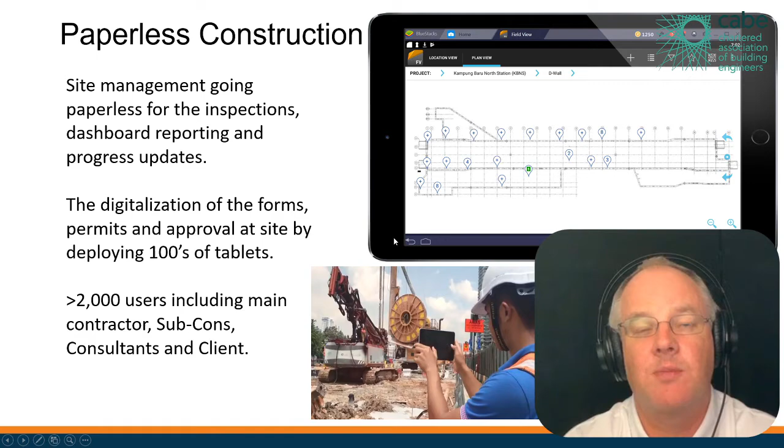And they've ended up developing a system and training up a team of people, which is, in my opinion, an absolute roaring success. They've deployed hundreds and hundreds of tablets across the sites. They have thousands and thousands of users of this platform. It's used every day on every one of our projects, across all the different disciplines. The team behind this is very large, but two key guys are Tony Joseph, our development operations manager, and David Kong, head of our QA/QC. Those two guys have developed, trained, and executed some of the best digital implementation that I've seen.

They've gone and looked at each different department - whether it's health and safety, quality, progress approvals, or engineering - every single department across every single station, and they've come up with forms on the iPads and tablets to replace paper. And it's been a huge success.

And what's interesting is that the lessons learned in developing these technologies and the use of the tablets, we've used that same technology to manage the COVID-19 pandemic on our sites. So now if you come onto one of our construction sites, you will see firsthand these tools, because you will not be allowed on site unless you've been granted access and have a QR code. You'll need a QR code, which will trigger an entry into a database of your arrival at site, tracking the GPS coordinates of the device so it knows exactly where you are.

It will record your name, your time of entry, and then record your temperature using a thermal sensor at the entrance, which gets logged into our database. We are legally required to monitor the temperature of all workers entering our sites, and we're using the same system for tracking all health and welfare checks. We're doing testing of all our staff - PCR testing, RTK testing - all logged on the same system. And now we're using that same system for a number of other projects. So what started off as a digitization of forms has become an immensely successful project.

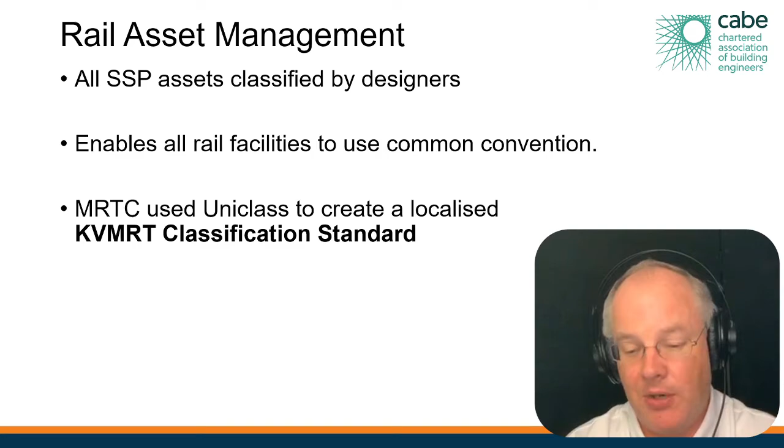Now, the last thing I'm going to quickly talk about is asset information management. In this case, I'm going to use the KVMRT. And the one thing I want you to get your heads around is the need for a classification system. So there is a uniclass system, which is the background of what I'm showing you here.

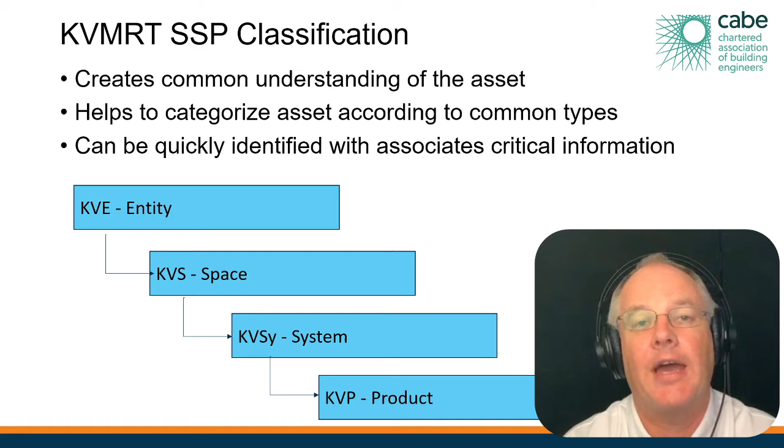Very quickly, the classification system is what's required to be able to structure the data in order to feed it into any kind of facility management system or asset management system. So if you don't have a classification system, you're not going to be able to move forward. This is the first lesson that we learned on the underground.

So there are 4 levels. The first is an entity level, so in this case, a railway station. That's the easiest one to understand.

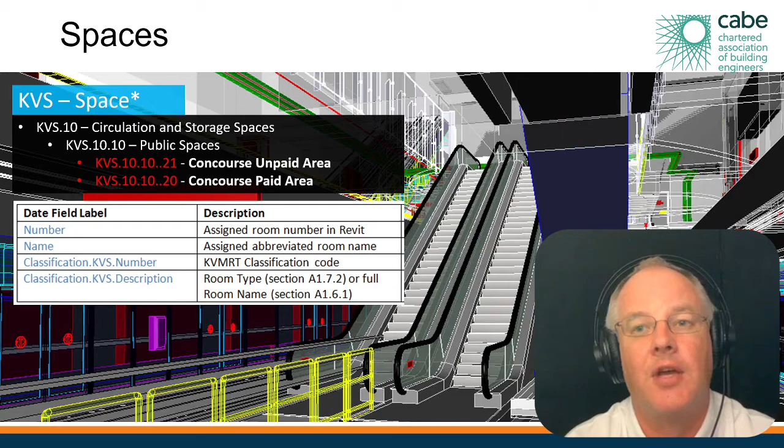The next is spaces. So in the world of BIM, you can use the tools to create 3-dimensional spaces. The spaces can then be labeled, and objects inside those spaces will inherit that information. So if you have a pump inside of a plant room, it will inherit the information about where it is.

Then when you have a particular system, so in this case a drainage system, which could be a pump sump system, once all the systems have been properly categorized or classified, we can determine which part of the system is there. We can determine if the system is complete, and then link that system into the database. Ultimately we get down to the actual individual products that are in that system, where it could be a cooling tower, a chiller plant, etc. So each of these systems has to get identified down to this level.

This is something that the engineers have to input into the design models during the design process, and they have to follow a very strict coding system. Otherwise, the whole thing goes to pot.

Again, if you've not seen these classification systems, and if you're listening to people talking about implementing PAS 1192 or ISO 19650 or asset information models or employers information requirements, this is one thing you have to get your head around. Without classification, you can never meet those requirements.

So the last thing in terms of getting this to work is the overall team responsibility. You've come up with your idea, you've proved it in a proof of concept, you know it works, and you know that you've got a budget for it. You now need to work with people who are willing to change.

In your organization, there must be, and I know there are, many, many engineers, many technicians who know we can do a better job. So you have to get them to attend training. They have to learn these new systems. They have to be willing to change their ways of working. And you have to get them to provide feedback, suggestions, ideas. Then you can commit to making this change in the overall business a success.

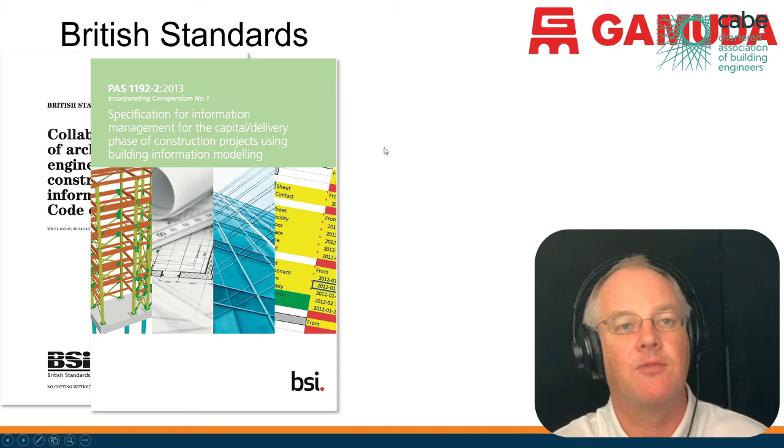The famous BIM standard is PAS 1192 Part 2. This document was written in 2013 - the one with the famous BIM wedge, with all the information about employer's information requirements, BIM execution plans, and the processes around tendering, appointment, and verification of services. Part 3 deals with information management for assets, which is what we use for asset information. Part 4 deals with COBie, a specific UK requirement for using COBie to collect asset information.

Part 5 is to do with security of information for the asset, not the security of the actual built asset. And Part 6 is to do with health and safety, using BIM for construction health and safety audits.

It's a very UK-centric document. The PAS 1192 suite are a set of British publicly available standards, the only difference being that the original BS 1192 was a traditional British standard. The reason they're all publicly available standards is to make them easily, readily available to the market, and to avoid any obstructions in actually using them.

These have come out between 2013 and 2018, and subsequently have been developed into a suite of ISO standards. So the 1192 suite of 1, 2, and 3 has become ISO 19650 Part 1 and Part 2. Essentially, these are now a global standard. They're going to be used for work in Singapore, Hong Kong, and certainly for work in Malaysia in the coming years. These are documents that you're going to have to understand and learn.

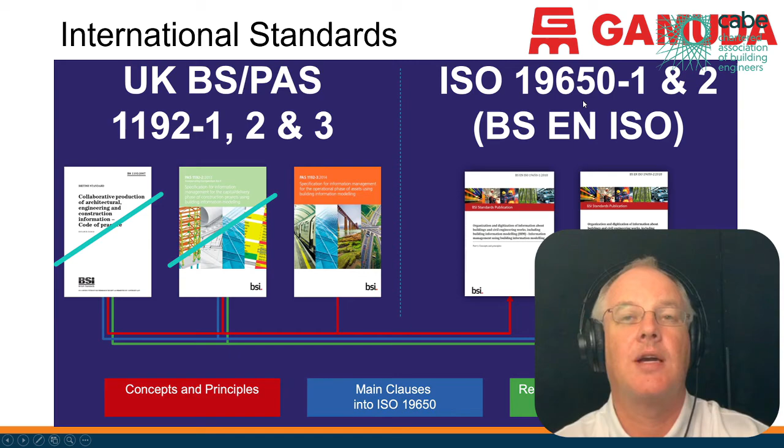But essentially, the principles don't change. So I could apply ISO 19650 to the MRT project. I could probably have applied it to the Cathay Pacific Cargo Terminal project 10 years earlier, obviously not to the full detail. But essentially, these are the key documents that everybody needs to be familiar with. So whether it's PAS 1192 or ISO 19650, these are the two main BIM standards, and then obviously there's a lot more besides that.

Hopefully, Mohammed, that answers that question. Let me go back to the chat box. I think we've lost Chu - not sure if he had a bad connection or I had a bad connection, but Mohammed, I hope that answered your question in terms of standards.

Daniel's agreed to my comment. Okay, so we've got another question here - let me see if I can get the names right. I do apologize if I pronounce your name wrong. There's nothing worse than being called the wrong name. I've been called Roman, I've been called Ronin as in Japanese warriors, I've been called Rohan, I've been called Ron, and I've been called expletives, which I won't go into.

So the next one I've got here is actually from Ivan Sadikin, I hope that's correct. Just curious, in your recent projects, do your clients have an EIR or BIM requirement, or do you still need to help them define what kind of BIM implementation?

Brilliant question. So on the MRT project, MRT worked with Arup during the preliminary design, and they developed a very, very good, very well considered employer's information requirement, or BIM specification. So we started from a very solid position with the actual tender documents. That was somewhat from learning on the first project on Line 1, somewhat from the learning of projects in the UK, particularly Crossrail. But essentially, the client did have a reasonably good EIR on that project.